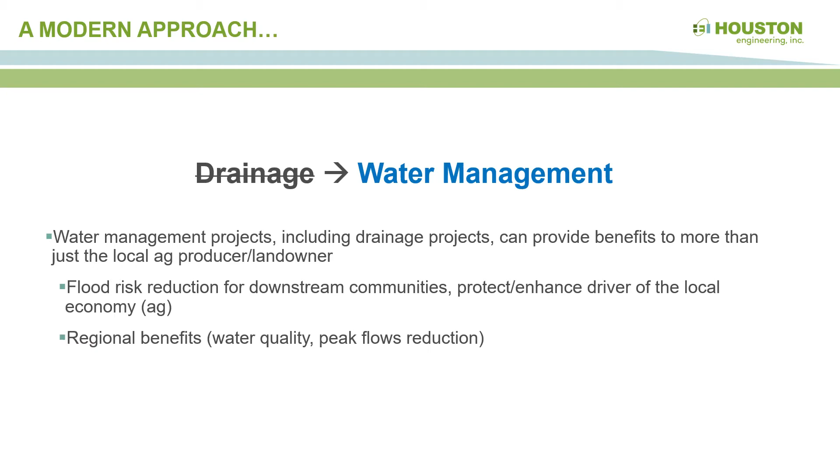With agriculture being a leading industry in North Dakota since the state was founded, surface water drainage has long been a vital tool for improving the state's economy through increased crop production. What often gets overlooked are the other benefits provided by projects that improve conveyance, as they often provide flood control benefits for rural residences, downstream communities, and the larger watershed, not to mention the fact that they provide economic benefits to the local economies that are often driven by agriculture.

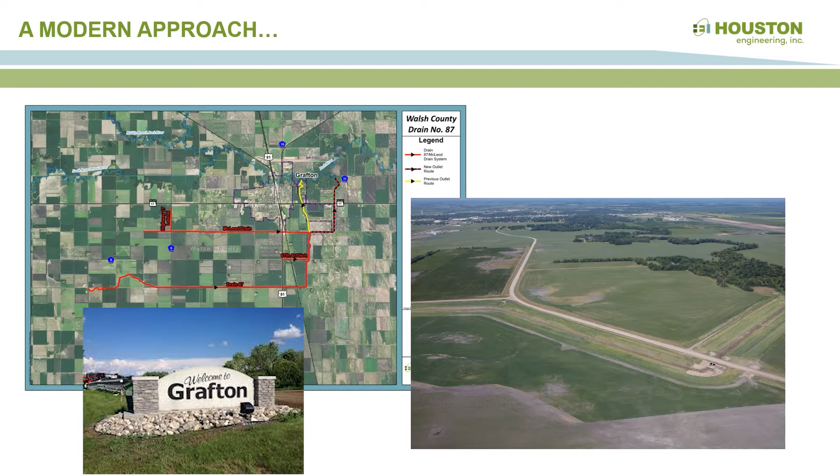One recent example of this is the construction of Walsh County Drain 87 near Grafton. This newly created legal assessment drain serves a benefit area of nearly 33,000 acres, while also providing critical flood risk reduction benefits as part of the city's recently constructed flood control project.

In recent years, we have seen efforts to quantify and recognize these ancillary benefits, and we are also seeing somewhat of a paradigm shift as stakeholders are looking at the larger picture and taking a more holistic approach to water management. Perhaps this concept is not entirely new, but we are certainly seeing a renewed focus on certain aspects, along with considerations for new thoughts and technologies.

The result of this is that we are seeing a concerted effort toward treating water as the precious resource that it is, while looking for ways to manage that resource in times of excess and times of scarcity. We're also taking a closer look at the impacts associated with these types of water management projects, both positive and negative. In many cases, this means we have to take a new look at the old way we've been doing things. What are we seeing in terms of this changing approach? Let's touch on a few key issues here.

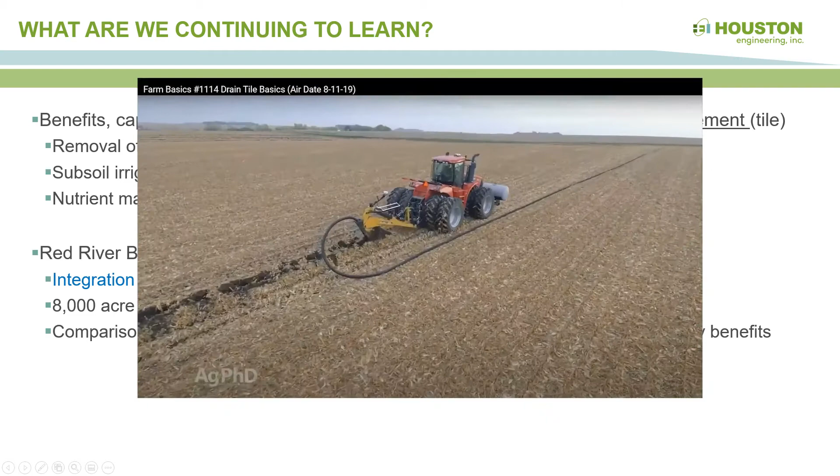Subsurface water management, more commonly referred to as tiling, has become commonplace throughout many areas of the state, and that trend looks to continue as producers recognize the value of investing in that technology. Not only are we seeing ag producers utilizing tile to remove excess water from their fields, but we're also seeing them utilize their subsurface infrastructure to manage available moisture during drier periods.

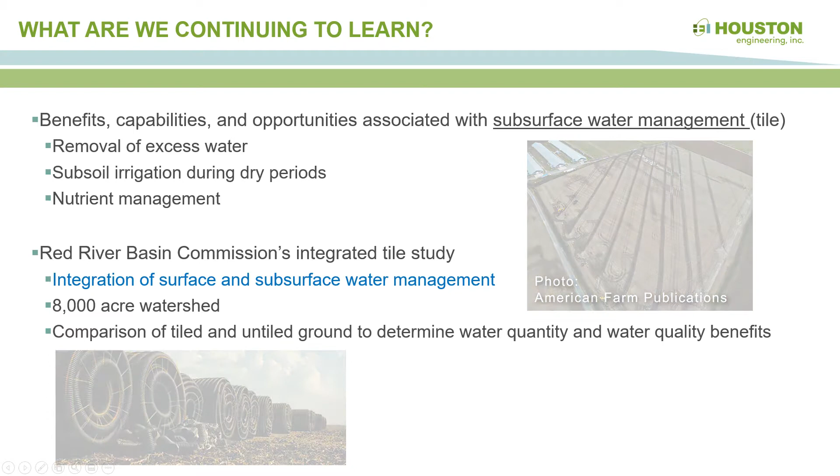We're also seeing great interest in utilizing these systems to better manage nutrients, with the goal of not only maximizing crop production and economic benefits, but also improving water quality for a much larger population of stakeholders. The Red River Basin Commission is currently undertaking an important pilot study that will analyze the integration of surface and subsurface water management on a watershed level, and the results could have significant effects on how we manage water in North Dakota and throughout the world.

This pilot study will involve a watershed area of more than 8,000 acres that is currently served by an existing legal assessment drain. The study will allow for an integrated system of surface and subsurface drainage measures to be compared to a control area without significant subsurface improvements, which will allow for an analysis of the associated water quality and water quantity benefits and impacts.

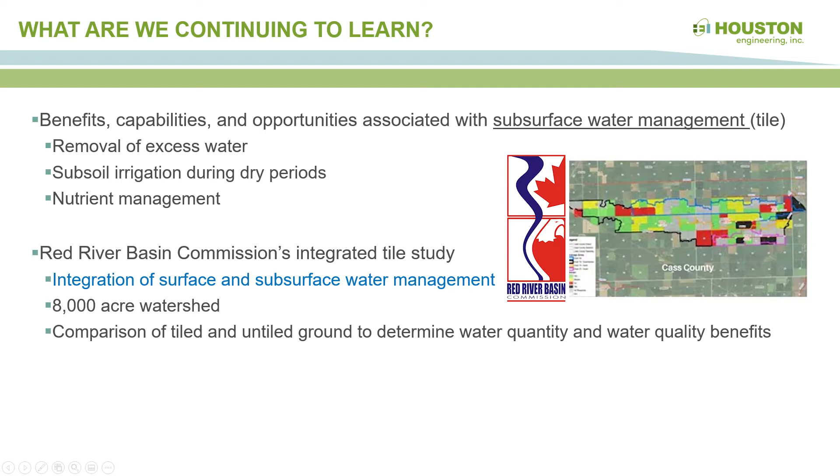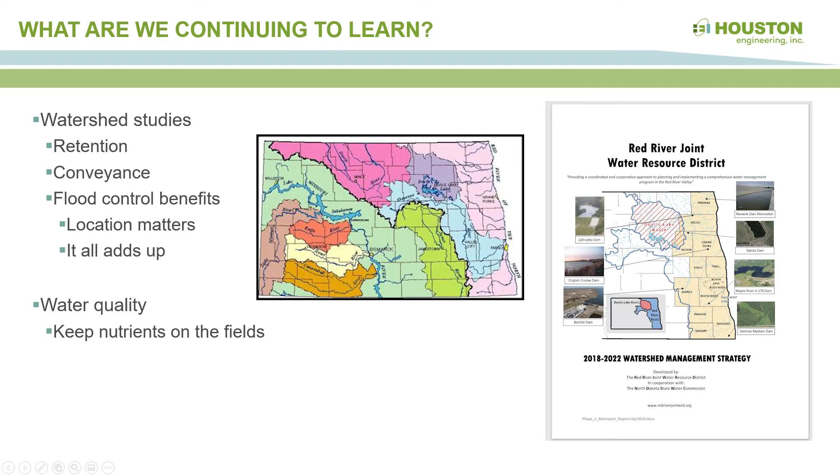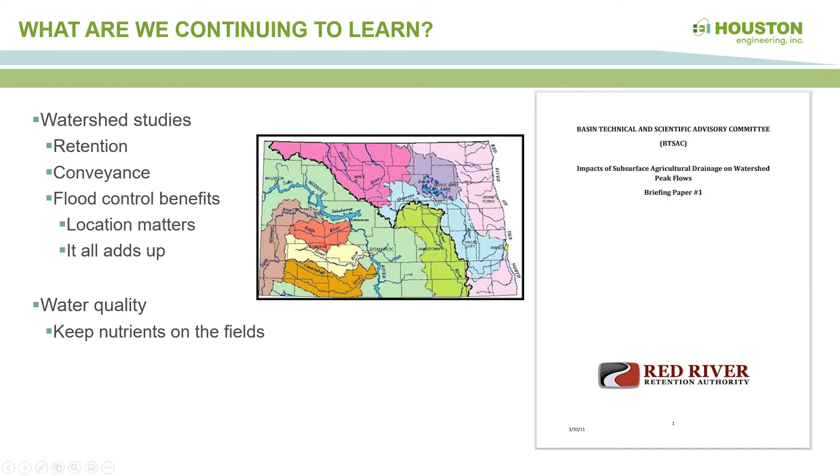Looking at surface water management, we have learned a lot about the many watersheds that make up the drainage basins throughout the state. In the eastern part of the state, we have a better understanding of the impacts that retention and conveyance projects have on local and regional flooding that have been so common in recent years. We know that retention is not the silver bullet to solving these flooding problems, and we also know that in some locations, improved conveyance can actually reduce downstream flooding. What is clear is that looking at each project as a piece of a larger puzzle allows us to address local needs while still providing benefits to the watershed as a whole.

Perhaps the most obvious obstacle to advancing watershed management plans and projects is the funding associated with improving or constructing the necessary infrastructure. There are also hurdles in the form of existing perceptions and the need for education and outreach. For now, let's focus on the physical tools needed to move these projects forward. In order to realize the benefits of an integrated approach to surface and subsurface water management, we need adequate outlets to convey the water downstream in a manner that minimizes adverse impacts.

These outlets typically come in some form of a surface drain, either natural or artificial, and they can be privately constructed and maintained or publicly constructed and operated. Let's focus on the public facilities such as legal assessment drains for now. Many of these existing facilities found throughout the state are antiquated, with many constructed in the early 1900s and many more constructed during a wave of construction in the 50s and 60s. Many of these drains cannot adequately handle the amount of water we are seeing during wetter cycles, and they provide a substandard level of service for the higher value crops we are now growing in many parts of the state.

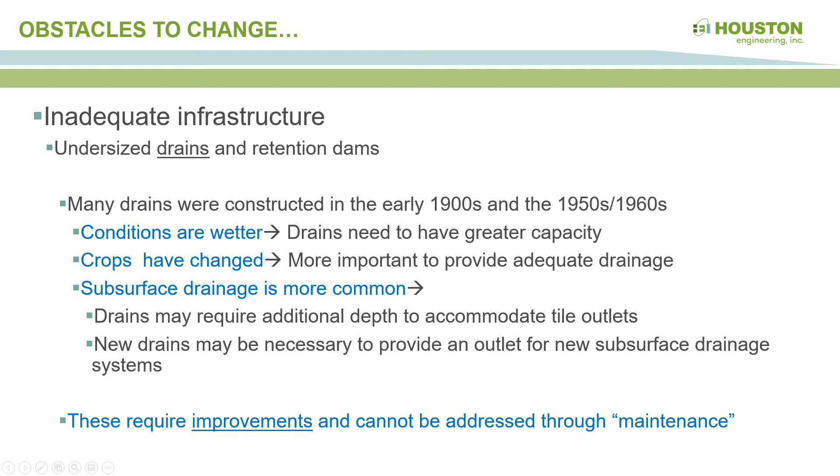The old facilities also fail in many cases to provide adequate depth and access for tile outlets. As Roger Olson, the chairman of the Maple River Water Resource District, frequently points out, we don't see many 1960 Allis-Chalmers tractors being used for production agriculture these days, even if they've been well maintained. Farm equipment has improved over the years, and we need to think of water management the same way.

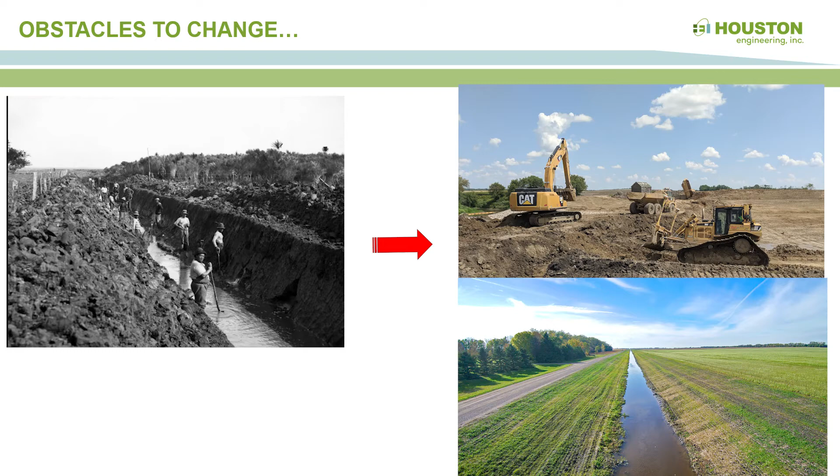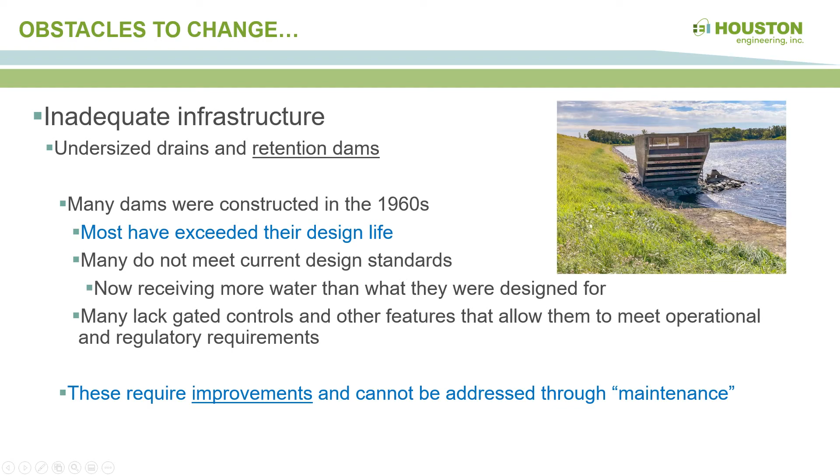Further advancement of the modern approach to water management may be limited by the ability to bring these existing facilities up to current standards and the ability to construct new facilities in areas that currently lack the necessary infrastructure. Watershed retention dams are an important component of the modern approach to water management. While they do not convey more water, they do take pressure off of downstream conveyance facilities and provide a tool for addressing adverse impacts that could result from some conveyance projects.

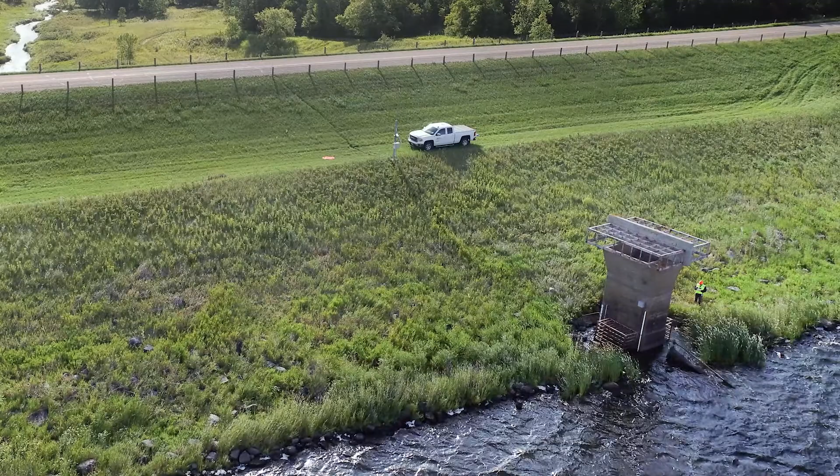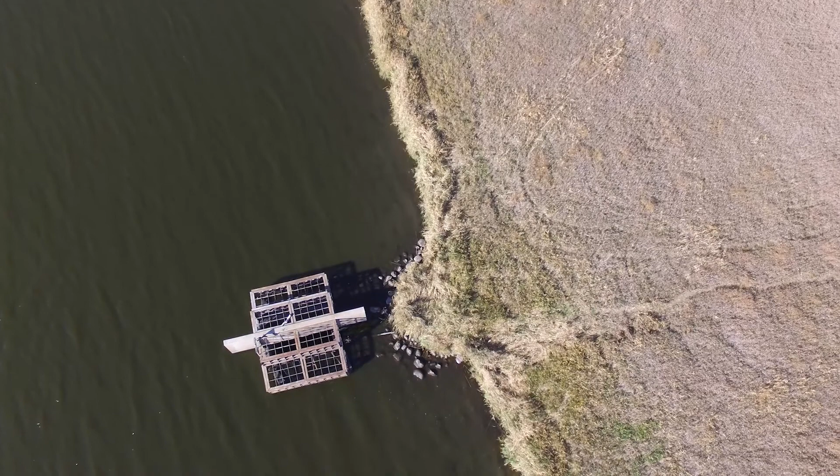And in that sense, their use as a tool is not necessarily a modern concept, but the tool could use some modernization. Here again, we saw many of these watershed dams constructed in the 1950s and 60s, and many of these facilities have exceeded their design lives and are in need of improvements. We may also require added features, such as gated controls or other enhancements that address water quality or natural resource benefits that are needed to meet current operational and regulatory requirements. This too has the potential to impact our ability to realize the benefits associated with modern water management if we can't address these needs in the future.

So what have we learned, and what do we need to do to move forward with this approach? Let's start with a look at our public infrastructure. In some areas, the simple answer is that we need to construct new legal assessment drains and retention facilities that are designed to account for current standards and have an eye for what might come in the future. In other locations, we need to sharpen the existing tools we have. This might include expansions and improvements to our undersized facilities.

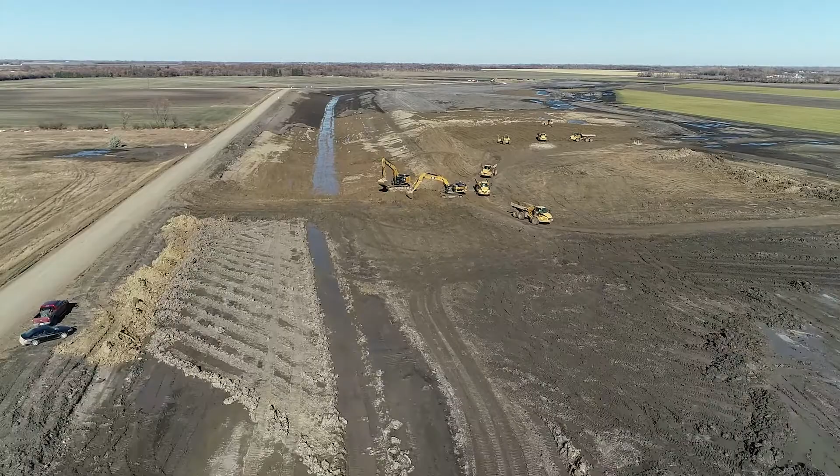For example, it's not uncommon to encounter a legal drain that is currently serving a much larger watershed than it was designed for, and we often see that drains were originally designed for a smaller design event than what our current standards would call for. So even without extending drains and expanding the watershed area they serve, we already see that many of these drains are lacking in terms of providing sufficient capacity.

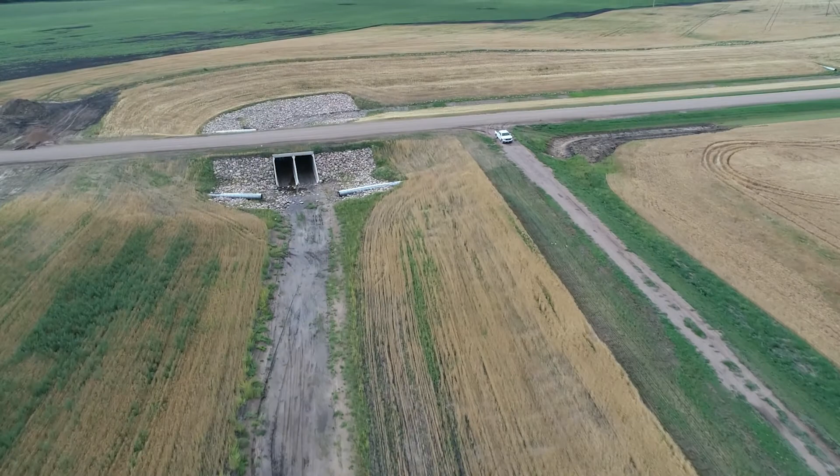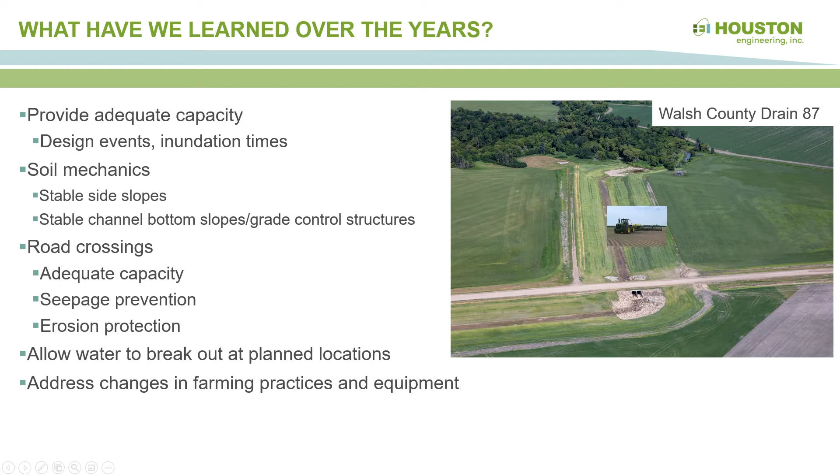In addition to deficiencies related to capacity, we have also identified design improvements as a result of years of observations and studies. These would include considerations for stable side slopes, channel bottom slopes that mitigate erosion, and considerations that address the impacts that inundation can have on crop production. We can also incorporate improvements to road crossings and include controlled breakouts that allow us to mitigate issues that occur during high flow conditions. It's also important to incorporate design features that address modern farming equipment and practices that simply didn't exist when these facilities were originally constructed.

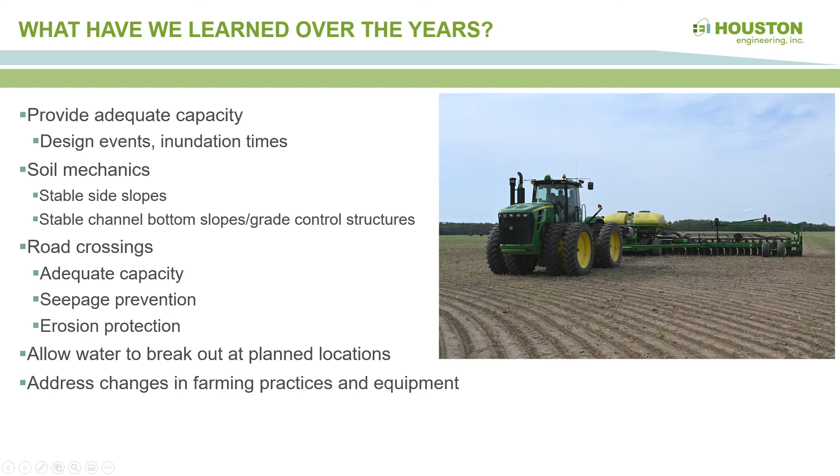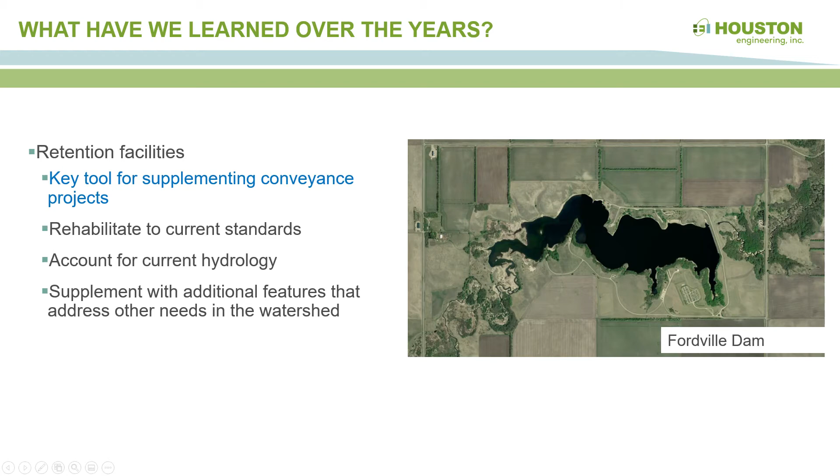These efforts constitute far more than maintenance and require a significant investment. Again, times have changed since much of this infrastructure was put in place, and we need to not only bring them up to current standards, but we also need to account for what might come about in the future. Similarly, with watershed retention dams, new facilities would certainly be beneficial in many areas, but we also need to make sure that our existing structures remain in operation and do so in a safe manner. This may require significant improvements to bring these structures up to current standards. There are a number of these efforts ongoing throughout the state, but the need far outweighs the available resources.

Moving forward with this modern approach requires a significant investment. Such an investment is not simply an investment in individual projects, it's also an investment in the larger watershed in the state of North Dakota. As we've discussed, this approach not only benefits one of the state's largest economic engines, but it also has the potential to provide flood risk reduction and water quality benefits throughout the state. So how do we know that this is a worthwhile investment? For one, we routinely see local stakeholders vote to tax themselves to cover the local costs associated with developing and constructing the facilities necessary to advance this vision.

We also see through the North Dakota State Water Commission's economic analysis process that these projects are providing benefits that exceed the cost of the investment from a financial standpoint, proving that these are wise investments of public and private funds. On that note, infrastructure projects like the ones we've discussed have often been constructed by government entities or publicly funded to some degree. These investments of public resources are critical to the advancement of improvements that provide benefits locally, regionally, and even nationally. Continued support for construction of improvements, as well as further study, educational efforts, and technological advancements, will help ensure that the modern approach to water management continues to lead our state to a more prosperous and healthier future. I'm looking forward to what we as water leaders are able to accomplish with water management throughout the state of North Dakota as we move into the future.